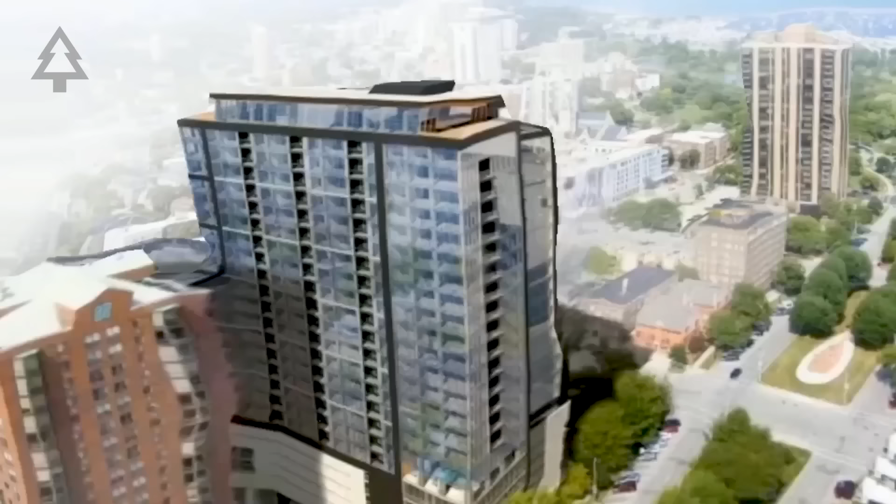This is a 25-story luxury apartment tower in Milwaukee. From the outside, it looks like almost every skyscraper built in the last century: steel, concrete, and glass. But let's look inside. The beams holding up the ceiling are wood.

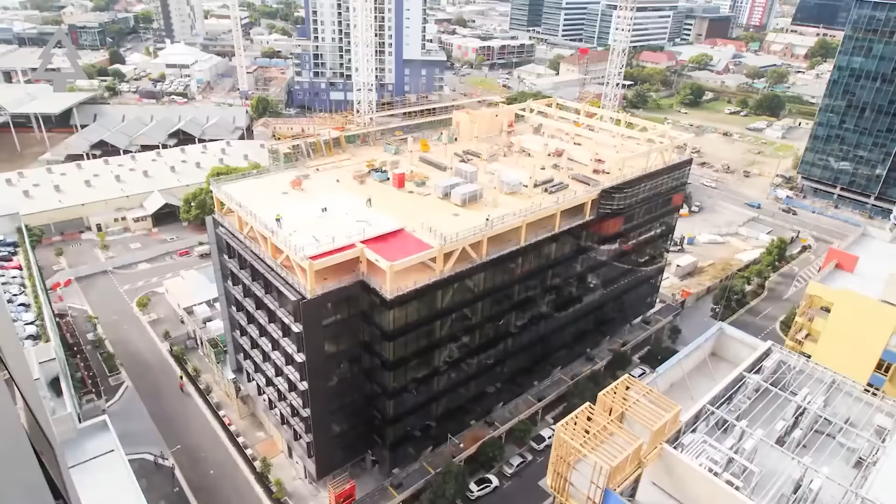The columns are wood. Above its concrete base, much of the tower is built from engineered timber, and it is not the only one. In Norway, Sweden, Australia, and Japan, architects are racing to build taller and taller buildings out of a material we mostly abandoned for big cities over a century ago. Which raises the obvious question: is this the future of our cities, or just incredibly expensive firewood?

For most of human history, we built with what we had. Wood was available, flexible, and strong enough for homes, barns, bridges, and entire towns. But wood had one fatal flaw: it burns.

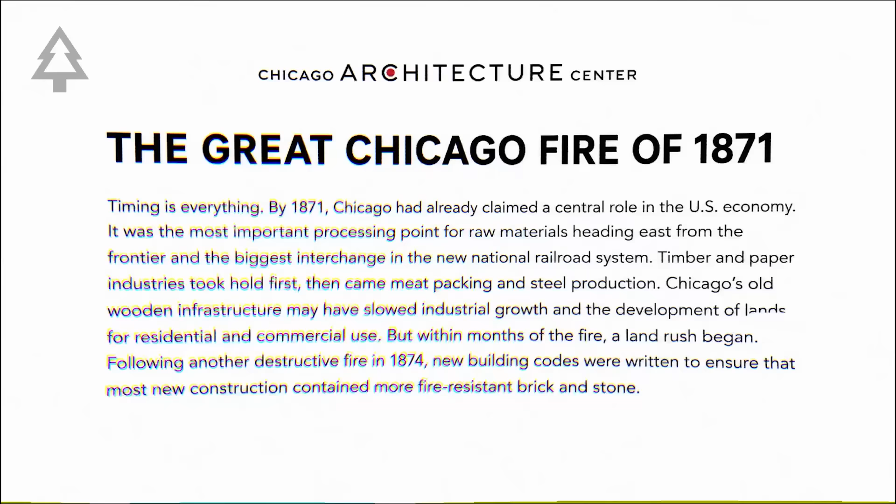After historic fires devastated cities like London in 1666 and Chicago in 1871, the world became terrified of wooden cities. Building codes changed. Large structures moved away from timber. And to build higher, denser, and supposedly safer, humanity turned to three materials: steel, concrete, and glass.

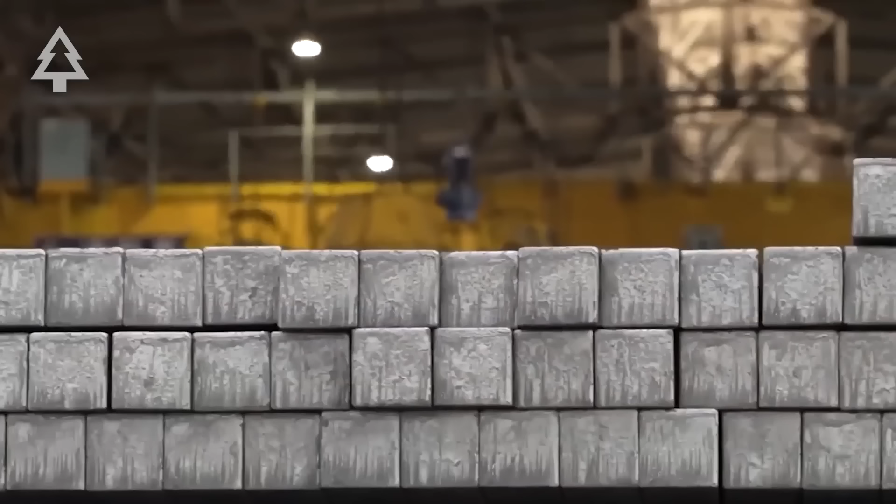Those materials gave us the modern skyline. They allowed cities to stretch upward and hold millions of people in dense urban centers. But they came with a massive hidden cost. Concrete and steel are among the most carbon-intensive materials on Earth. Producing them requires enormous amounts of heat, energy, mining, transportation, and chemical processing. A single large building can carry thousands of tons of embodied carbon before anyone even moves inside.

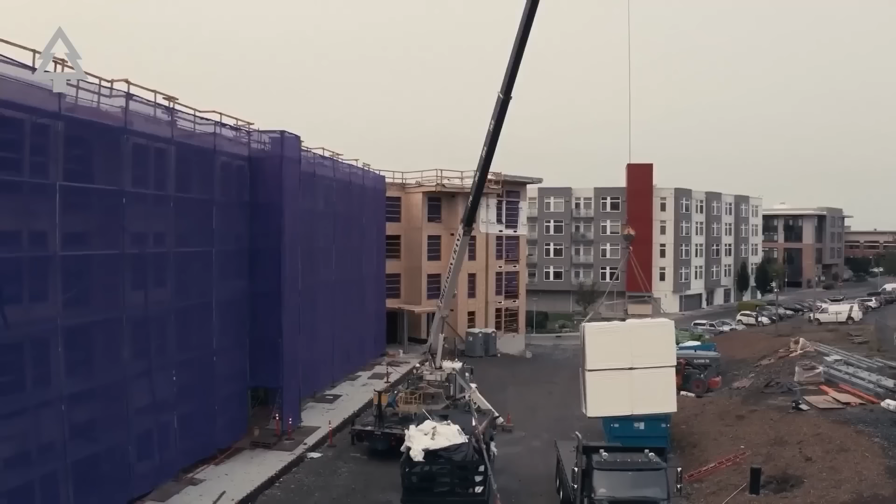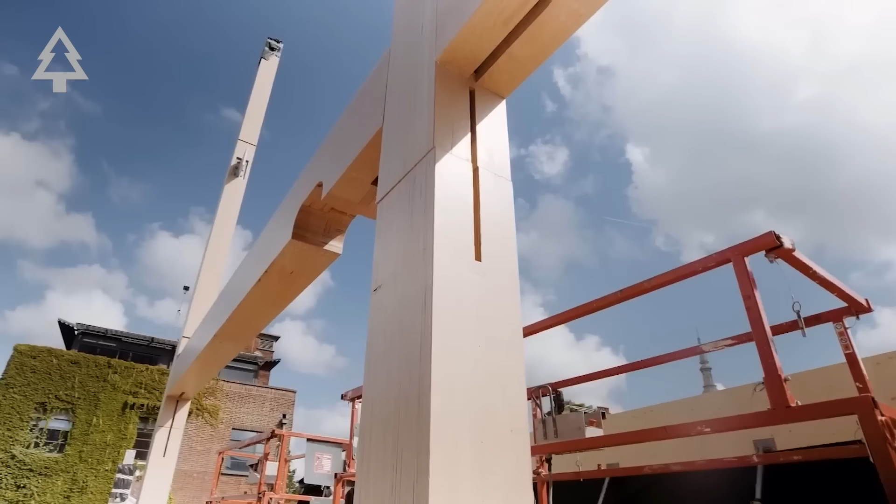But wood can change that. A tree absorbs carbon as it grows, and when that wood is turned into a building, much of that carbon can stay locked inside the structure for decades. So instead of only adding emissions during construction, mass timber can turn part of the building itself into long-term carbon storage. That leads to the real engineering question: how do you make wood strong enough to support a skyscraper?

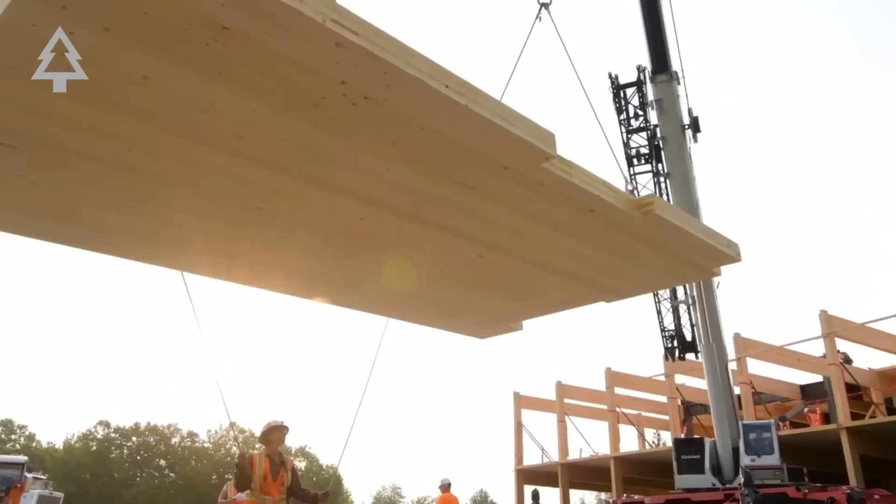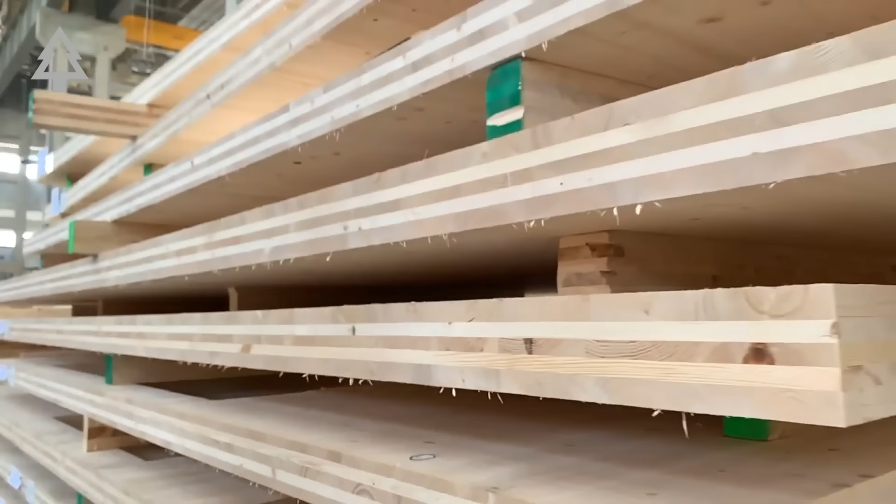You do not use regular lumber. You use mass timber. Mass timber is basically engineered wood built for serious structural strength. The most important version is CLT, or cross-laminated timber. It is made by stacking layers of wood in alternating directions, then pressing them together into massive panels. That makes the wood stronger, more stable, and able to replace concrete floors in many buildings.

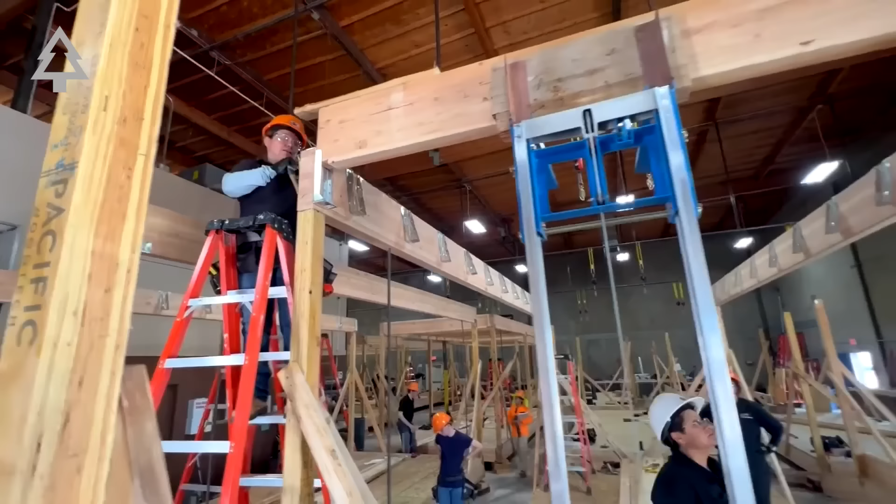Then there is glulam, or glued laminated timber. Here, the wood layers run in the same direction, creating huge beams and columns strong enough to replace steel in many parts of a structure. And there are newer options like DLT and NLT, which use wooden dowels or nails instead of glue to lock pieces of the lumber together into solid structural panels.

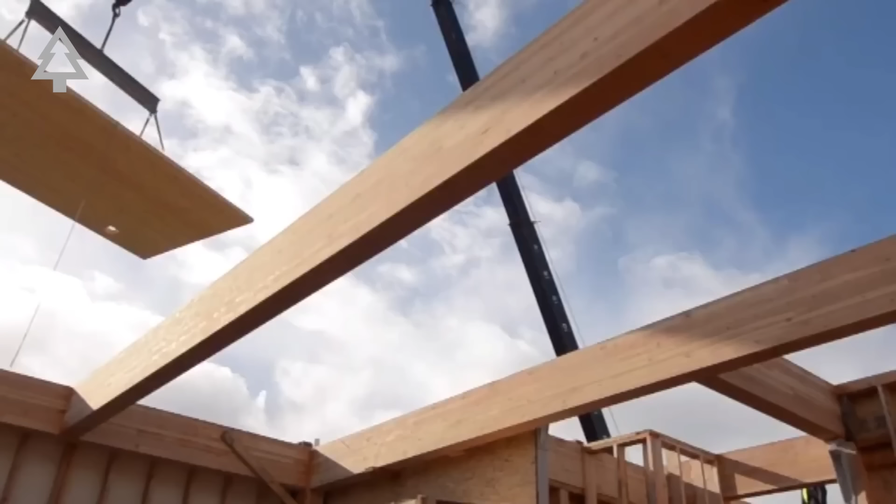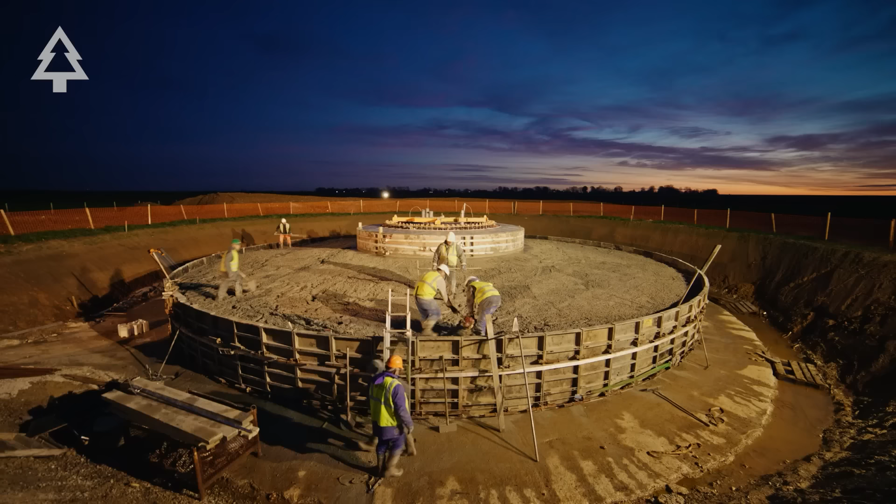The result is an intricately designed Lego set for a building. These massive timber pieces are designed digitally, cut to exact specifications in a factory, and shipped to the construction site ready to assemble. Instead of pouring concrete floor by floor and waiting for it to cure, workers can lift entire panels into place like pieces of a giant kit.

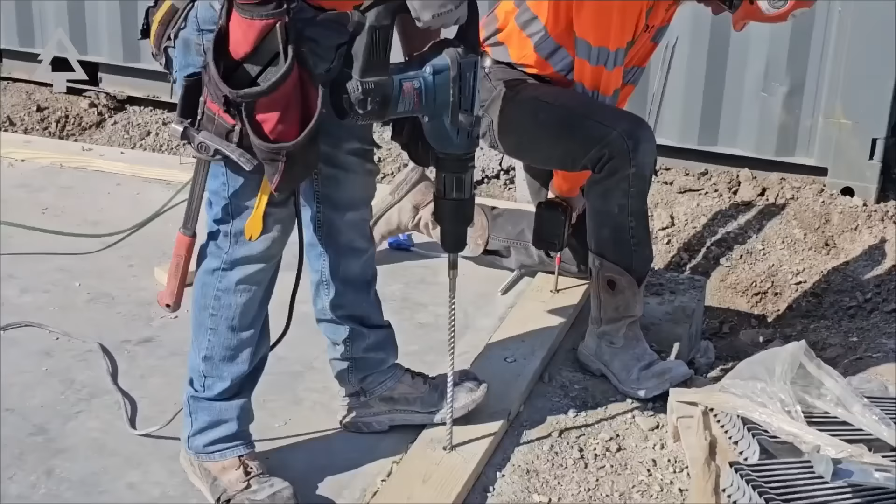That can make construction faster, cleaner, and quieter. Because the wood is lighter than concrete, the building can also require a smaller foundation. And on-site, there is often less dust, less welding, and less heavy material waste. During the construction of the Ascent Tower in Milwaukee, workers even described the site as smelling less like chemicals or exhaust and more like popsicle sticks.

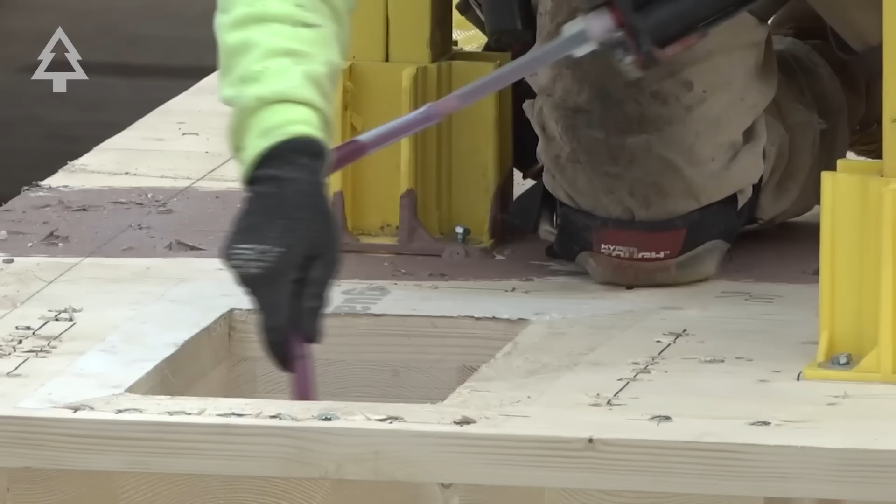That small detail gets at something bigger. These buildings do not just perform differently, they feel different. Exposed timber gives interiors a warmer, more natural atmosphere than concrete or steel, and some research suggests that natural materials like wood can make indoor spaces feel calmer, more restorative, and more connected to the living world outside.

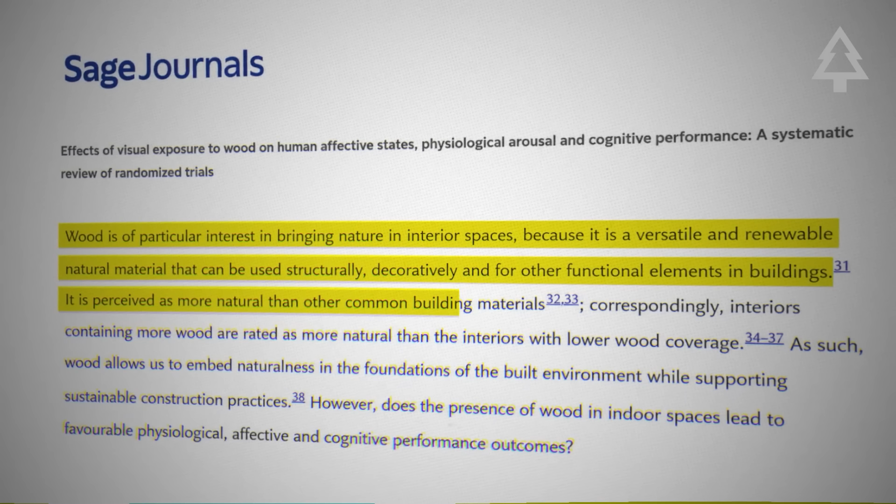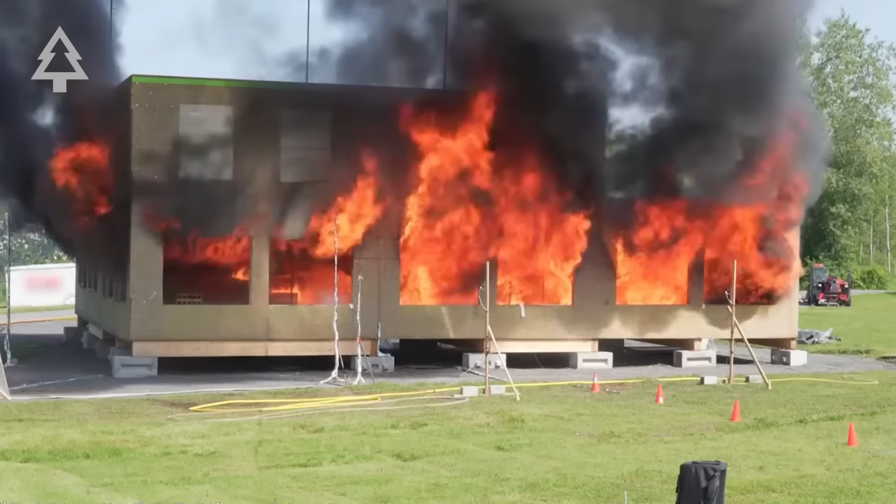But we have to address the elephant in the room. If a fire starts, does the whole building go up in flames? Counterintuitively, no. Mass timber behaves very differently from ordinary wood because of something called char. When a massive timber column is exposed to extreme heat, the outside layer blackens and forms a thick protective crust.

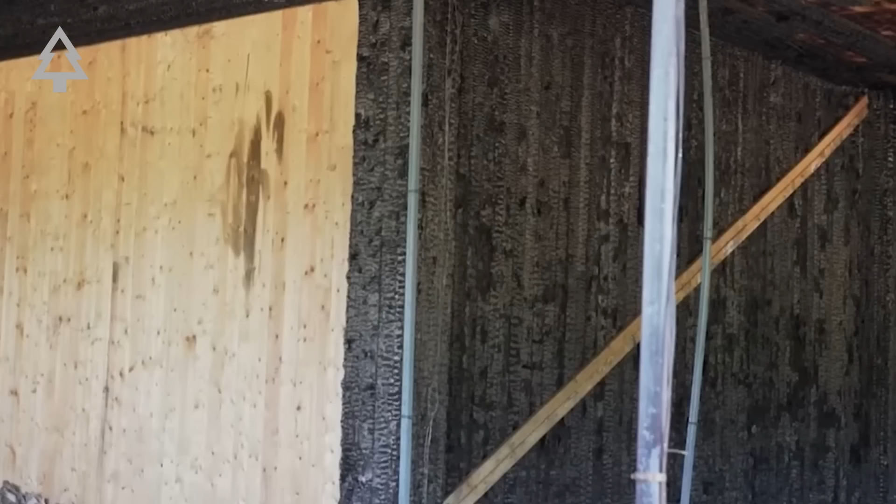That char layer acts like insulation, slowing the fire down and protecting the solid wood inside. It is the same reason a huge log in a campfire does not burn the same way as a handful of twigs. The outside chars, but the center can remain structurally intact for a surprisingly long time.

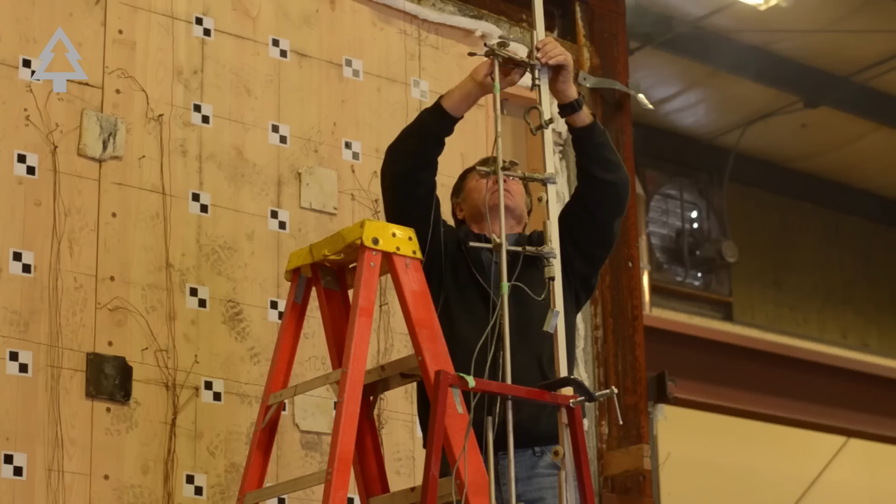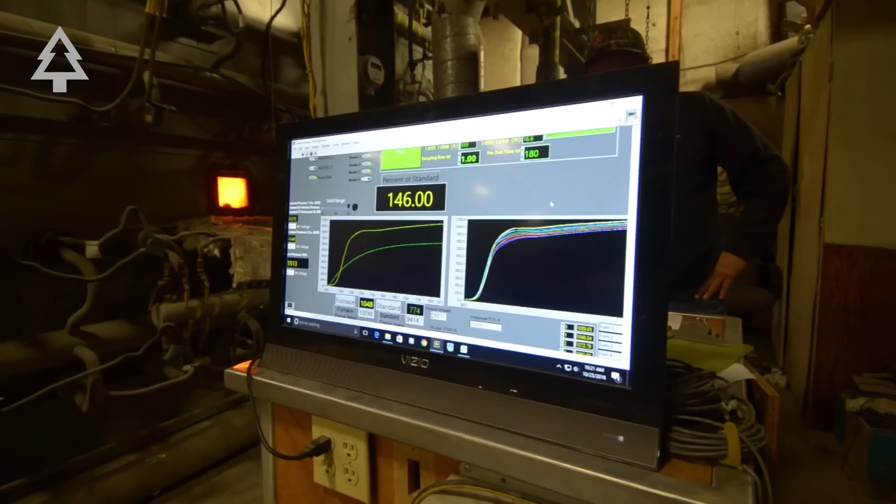To prove this to regulators, engineers have put mass timber columns through intense furnace tests. Under extreme heat, unprotected steel can lose strength and begin to buckle. But properly designed mass timber can maintain its shape because the char layer burns at a predictable rate, allowing engineers to design extra material around the structural core.

That does not mean timber buildings are fireproof. Nothing is. But it does mean that they can be designed to meet strict modern fire codes, just like steel and concrete buildings, and the proof is already standing.

In Milwaukee, the Ascent Tower became one of the most visible examples of tall mass timber construction in the world. In Norway, the 18-story Mjøstårnet Tower showed that timber could rise far beyond low-rise buildings. In Portland, a massive mass timber roof now spans part of the city's international airport, showing that this material is not just for apartments. It can shape public infrastructure too.

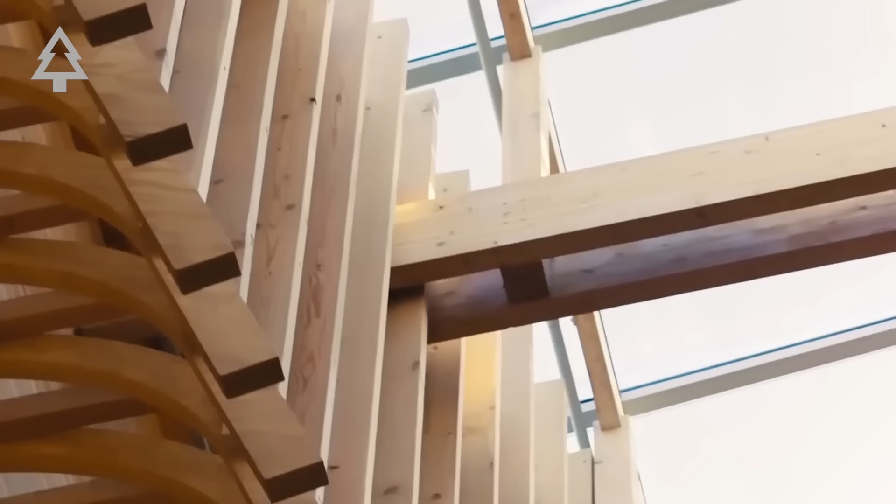More timber towers are planned in cities around the world, from Europe to Asia to North America. Some are modest, some are experimental, and some imagine futures where wood, steel, and concrete are combined in new ways to reduce the carbon footprint of urban growth.

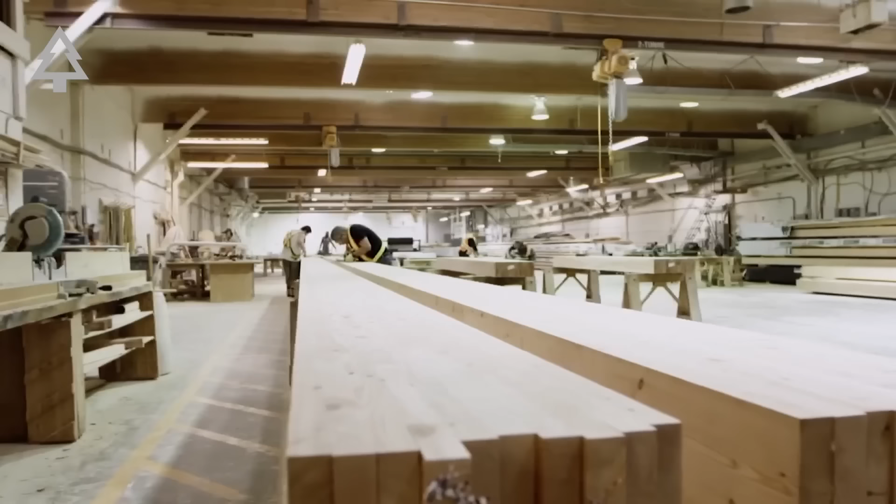But mass timber is not a perfect solution. It still faces real limits. Supply chains are tight. Building codes are still catching up. Moisture, mold, and long-term durability have to be managed carefully. And the environmental benefits only work if the wood comes from responsibly managed forests.

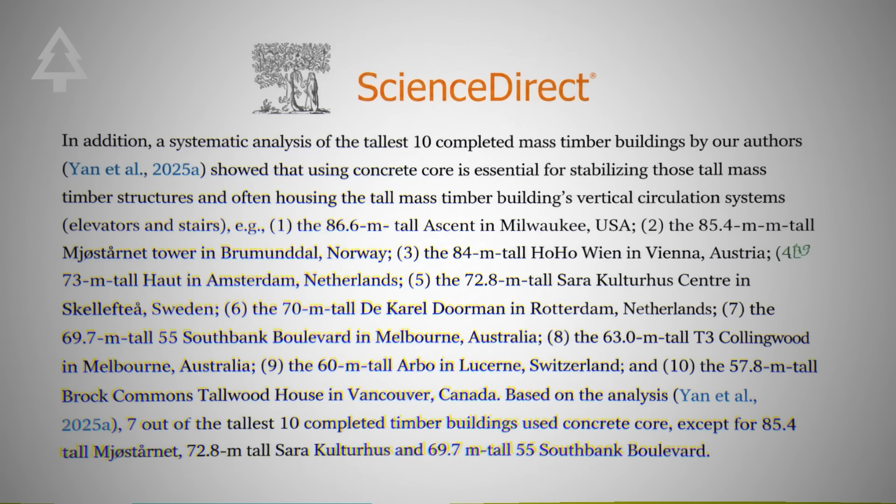There's also a structural limit. The tallest timber towers often still rely on concrete or steel cores to handle wind, elevators, stairwells, and lateral forces. So wood is not going to replace every material in the building.

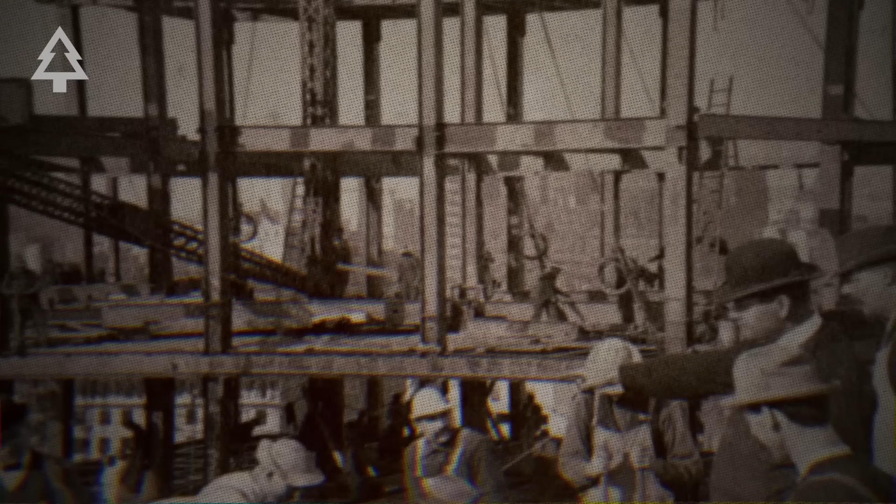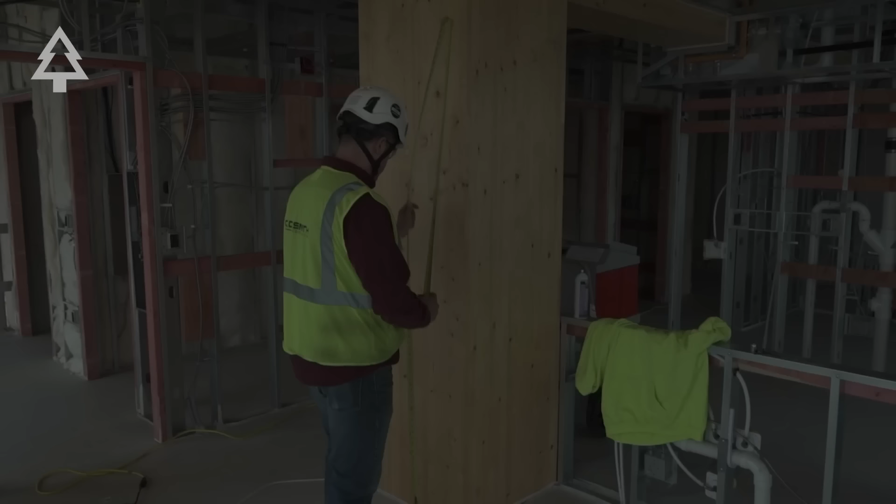But that's not really the point. The point is that for the last century, building upward almost always meant relying on some of the most carbon-heavy materials on the planet. Mass timber gives architects and engineers another option. Not a perfect one, but a powerful one. It allows cities to grow with materials that are lighter, renewable, and capable of storing carbon instead of only emitting it. So maybe the future skyline will not be made entirely of wood, but it definitely won't be made entirely of concrete and steel either.